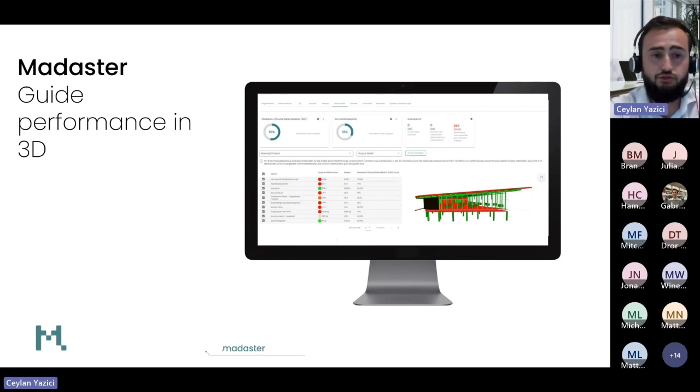We can also report and certify with the material passport. In the Netherlands it's already the case that this results in an extra BREEAM credit, and I can imagine this also exists in other countries. So material passports can be generated in a lot of options — just a simple management summary, but also a more in-depth technical summary if that's needed.

We can also benchmark within the platform, so you can really benchmark within your company. What that does is simply compare building A to building B and says, okay, building A is more circular, but building B has less mass. In that way you can really steer on the KPIs within your company.

So, a couple of use cases. When you get the slides, you can click on them and really see where Madaster is being used and what that does within the companies that are using it.

So it's really great that we are with so many people today, because changing the way we work in order to stimulate the circular economy is something we need to do together. We recognize this, and therefore we at Madaster work with a partner ecosystem. We work with the frontrunners of the circular economy all across Europe, and we are aiming at a worldwide partner network, so we're really happy to help you when we can. So what's next? As we would say, take full material responsibility. I'd like to thank you for your attention.

I'm here, yeah, nice to meet you. Hi, so nice to see you. I'm going to put my camera on briefly, but because of the lighting in this room there's a light ray coming straight through me, so I'm saying hi to everyone, and then I'll switch my camera off. Sweet. And then, so yeah, okay, double check. Perfect, all right, very nice to meet everyone.

Thank you very much for having me today. I'm very excited about talking again to Impulse Partners and your network. My name's Julian, I'm the COO of Ampd Energy, I'm based out of London. So just to give you a little bit of history on the company, we were founded in 2015 in Hong Kong by engineers building lithium-ion battery technology.

We really focused our company more in 2017 when we were approached by a construction company in Hong Kong who said, look, can you do anything about all the diesel generators that we use on our construction sites? Can you replace them with batteries? At that point, our CEO worked together very closely with the construction company, visited a lot of sites, and found out that you could replace diesel generators with lithium-ion batteries. And in the process, not only could it power a lot of the equipment that was on site, it could remove a lot of the problems that diesel generators have, and it could also do that at a cost that was often cheaper than what the diesel generators were.

And so from that point forward, we focused our company on a vision of an emission-free future for construction, reducing emissions in the construction industry. Since then we've scaled across 5 different countries now, and really made a lot of difference in terms of environmental impact. But along the way, we have realized that the technology we've developed is usable across multiple different industries, and so we've recently refocused our vision on what's called Clean Energy Delivered. The idea here is that we are aiming to replace or reduce diesel anywhere a mobile diesel generator is being used, be that in events, in film and TV, in mining, all these areas.

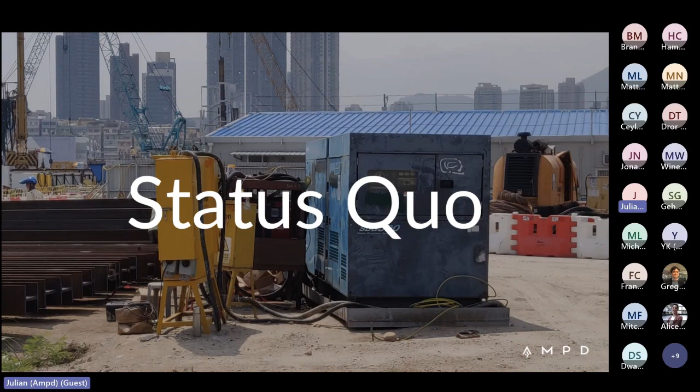So we are focused on basically eliminating or reducing the use of diesel there. But going back to looking at construction too, I can explain a little bit more about how our product works. What we realized when we started looking at these construction sites is either they had no power at all, or they did not have enough power to power all of the equipment on site, which was often thousands of amps. So what the site would do is use diesel generators. If they had a small grid connection, they would use that to power lights or the site office, and then a lot of the larger equipment was powered by diesel generators. But because that equipment wasn't being used all the time, it was actually a very inefficient way of powering it. Diesel generators have a lot of issues, and they're not technology that anyone particularly enjoys using.

They're noisy, both for the workers on site and also the local community, and that noise can actually harm workers' hearing over long periods. They have a lot of downtime due to refueling and maintenance. They break frequently — some of the newer generators in the Euro 5 category actually break fairly frequently, leading to a lot of downtime on site. And you have to bring diesel in and out of the construction site.

Diesel itself is a fire hazard if there's any flame nearby it, and so there's a lot of management that needs to go into that and risk. A lot of the generators out there have no data from them. They're not internet connected. They don't give back information on the operational parameters, on the maintenance or anything like that.

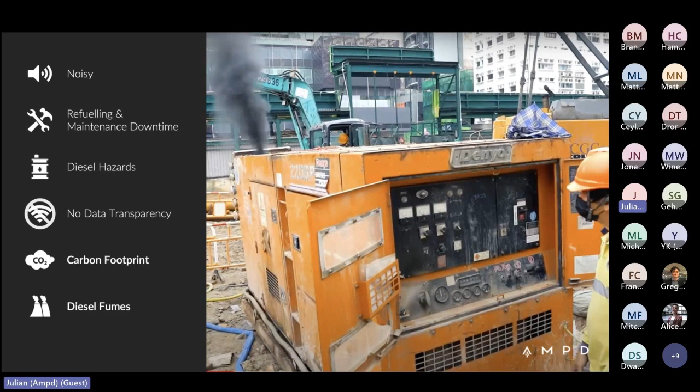But most importantly, they have a very high carbon footprint, much higher than a car. I think it's like 200 times a car, because they're on all the time, all day, every day. And they emit a lot of diesel fumes, which is obviously harmful for both the workers and also the local community around the site. So we worked together with this construction company in Hong Kong to build the Enertainer, energy container, two words combined.

Which is the first cloud-connected energy storage system specifically designed for construction sites. So when I say specifically designed, this includes the mobility of the unit, being able to move around, the safety of the unit, extra safety parameters and systems in place, which were needed in a very mobile and flexible work site. The ability to deploy it very quickly, and to then decommission it very quickly. All the software systems are designed for the construction industry, and so we made it as operationally easy to use as possible, which has been a great success.

So the way it works in reality is that if you look at a lot of the generators deployed in construction, they're often oversized for what they do. The reason for this is that construction equipment, like a crane or a hoist, when it's lifting, needs a very high power just at the point of lift. But most of the time, about 90 to 95% of the time, it doesn't need any energy at all. And so these generators are sized for that peak, and then the rest of the time they just give out a tiny level of power, which is very inefficient.

What you can do with a battery is you can power it on a much smaller connection, fill up the energy within the battery, and the battery handles the peak at the other end. And what this means is you don't have all this idling time from a diesel generator where it's burning fuel and creating emissions and all those kind of things.

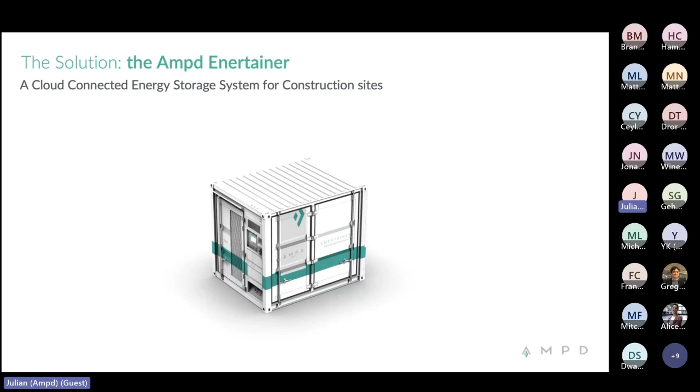Just to give an example, some of the large cranes need about 400 or 500 amps of power at the point that they're lifting. We can power that on a 20 amp or 30 amp feed. So you're reducing your power requirements really, really significantly, which allows you to either use a smaller connection available nearby, or a very small diesel generator running very efficiently, which reduces the diesel usage. And this allows for a very big impact.

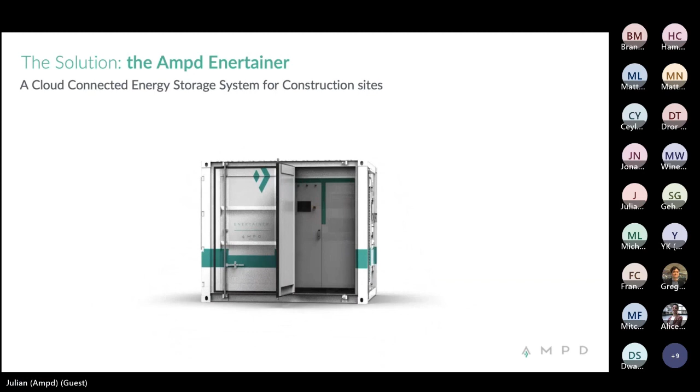So the benefits, as I mentioned, are actually, in the UK, a 90% carbon reduction compared to diesel generators. Completely eliminate the air quality pollutants at site. You eliminate the safety risk associated with diesel spillage and fire. And we're over 30 times quieter than an equivalent diesel generator, which not only is better for the local community and the workers, but also often allows sites to work longer hours than they otherwise would.

We also are cost effective in many cases, in the sense that we're actually cheaper than the generator plus diesel. The battery plus electricity is cheaper than the diesel rental plus the diesel itself. We're connected from the ground up. We're designed to be a connected device, and that allows us to do remote operation and maintenance work, gives a lot of data back to the construction sites, and allows us to access the unit remotely when we need to.

And finally, we're much more reliable than generators. I think generators, we've heard from customers, have about 300 hours per year which is lost due to refueling and servicing. We recommend a biannual visit from a maintenance point of view, but the rest of the time we're very reliable.

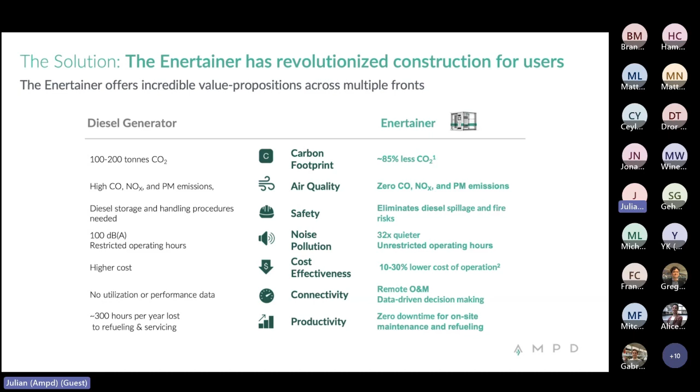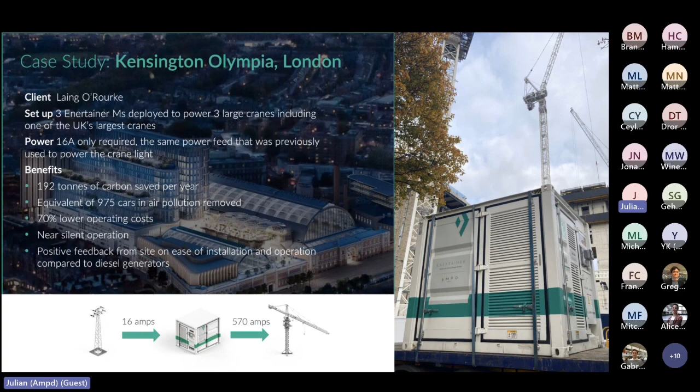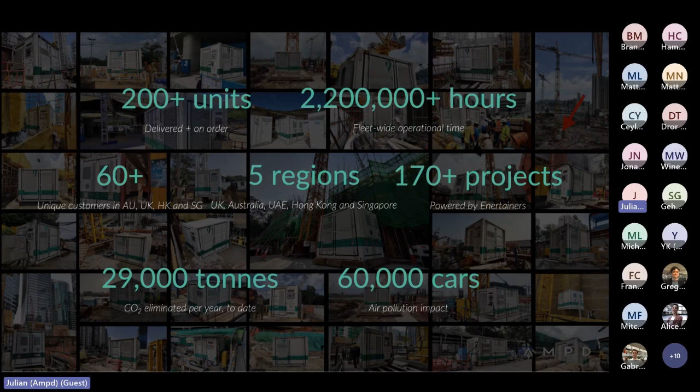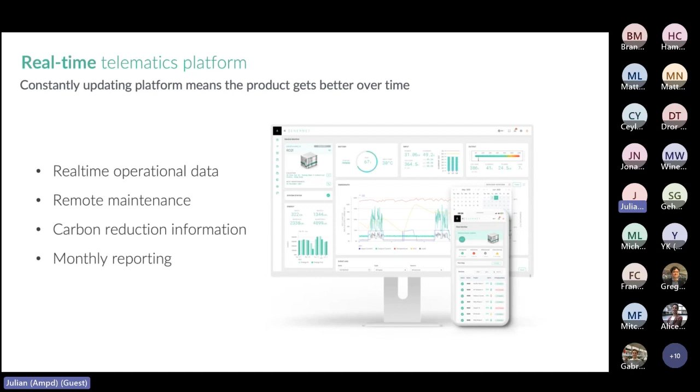This is the platform I was mentioning. One of the great things about our product is it improves over time, because we have a constantly updating software platform. That software platform today offers real-time operational data on what the unit's doing, remote maintenance capabilities that we look at, but also the customer looks at, and can go back historically to see what's happened to the unit. Carbon reduction information, energy usage information, very useful for sustainability teams to see the impact these products are having on their carbon emissions. And monthly reporting, so you get full reports on everything that happened over the last month, with increasing functionalities coming every month.

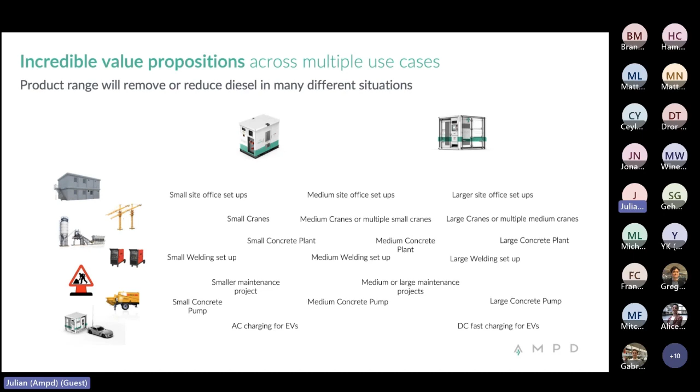To give an example of what that looks like in terms of use cases: the smaller unit might be used in a small site office setup, our larger units in larger site offices, smaller unit for small cranes. Now we're looking at concrete pumps, so we can do everything from small to large concrete pumps, small to large welding sets. The smaller units will be very good for maintenance, so we're looking at railway maintenance, road maintenance, all these kinds of maintenance projects where you need power or energy for a certain amount of time. Concrete pumps, and then electric vehicle charging, particularly on construction sites where you need to deploy it quickly, for AC or DC charging. So we're covering a much wider use case.

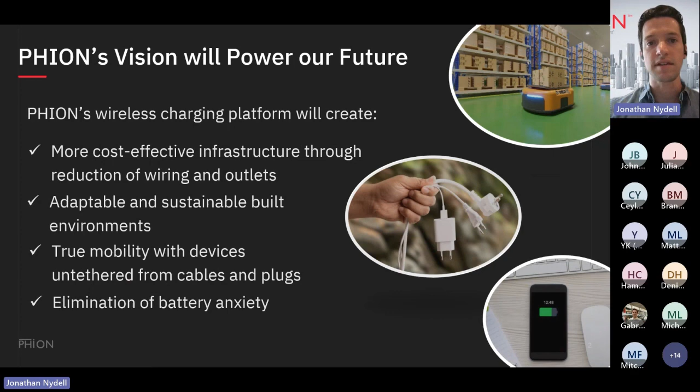Introducing the PHION One solution, the only over-the-air wireless charging platform capable of combining safe and scalable multi-watt power delivery, covering a massive charging volume and defining a new standard for mobility.

The modern job site contains kilometers of electrical cable, hundreds of sockets, electrical installation that requires hundreds of hours of labor. Fixed cabling runs counter to the space flexibility and operational efficiency, both of which are now required in today's built environment. And with the majority of job site workers using electrical devices reliant upon them, charging currently requires a conscious effort during lulls in construction work.

The PHION One platform enables daily efficiency in equipment access and mobility improvements that scale with the size of the project. Through light-based power transfer, the system scales up or down the charging power depending on the device and its requirements. With near hemispherical coverage, omnidirectional charging covers a massive floor space. And finally, the platform includes secure two-way communication between dedicated PHION receiver and transmitter for charging diagnostics, device tracking, job site applications, with access to data that no one else has.

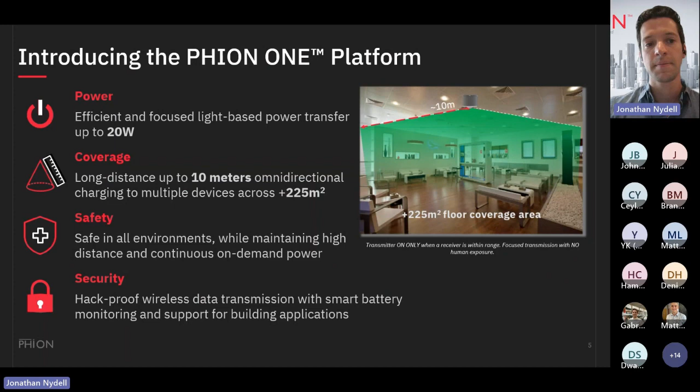The first version we're releasing this year is just the beginning. The platform is evolving, with the next generation delivering 4 times the power to multiple receivers at double the distance without compromising safety or efficiency. What's a lower power system today will scale up to higher power delivery systems following our second generation platform.

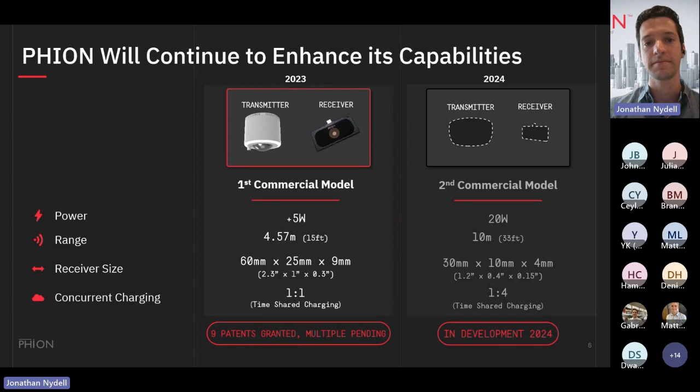PHION's technology delivers more power over distance than any other company in the wireless charging space. What's more is, unlike others, there is zero loss through the air, meaning that the power delivered at 1 meter is equivalent to the power at 10.

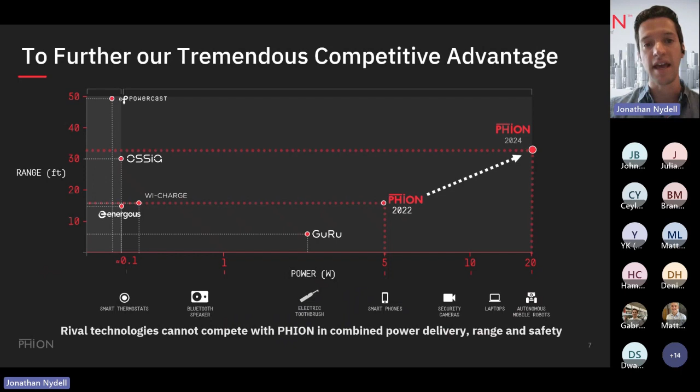The scalability and efficiency of our solution has near limitless applications. No longer are we reliant on small IoT devices for wireless charging, but we can power industrial sensors, personal electronics, robotics, medical devices, construction site equipment. Our platform is a singular solution for the majority of end user devices, simplifying the installation and use of wireless chargers.

One of the challenges that sensor OEMs will face is the trade-off between wireless reporting frequency, how often they transmit the data, and the battery life. The relationship is quite simple: the higher the reporting frequency, the shorter the battery life. On a construction site or industrial environment, near real-time measurement can be critical to safe and efficient operation.

In one of our pilot cases, PHION plans to charge worksite cameras responsible for converting analog measurements into digital data. Crucially, the reporting frequency improves nearly 500x with PHION's wireless charging platform, charging cameras seamlessly and without placement restrictions.

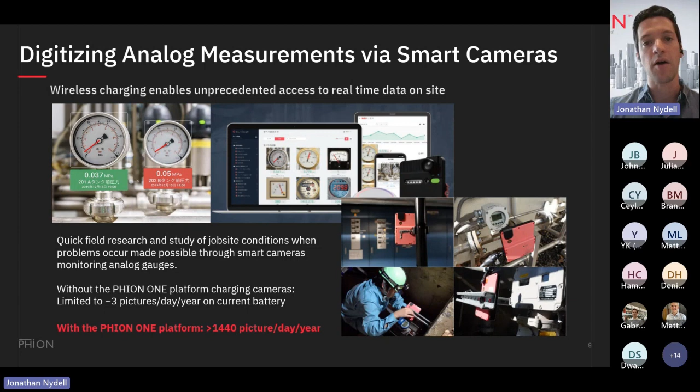Our go-to-market strategy includes two major phases. In phase one, we go direct, integrating transmitters and receivers into GC projects and commercial real estate, establishing the wireless charging enabled infrastructure of the future. In phase two, the integrated infrastructure is our technical and commercial validation to win the OEMs for direct product integration.

This is our end goal: to become part of the product instead of an additional add-on. We see, for example, the iPhone 20 with an integrated PHION receiver and facility lighting of the future with an integrated transmitter, creating a wireless power network behind the hardware.

As an enabling technology, PHION's platform is deeply applicable to a wide range of public and residential infrastructure, similar to the near ubiquitous use of Wi-Fi today. Over 70 billion square feet of existing commercial real estate in the US alone, we're a part of a wave of intelligent infrastructure innovation through services and the integration of IoT devices. Yet, with the proliferation of IoT hardware, it necessitates a sustainable and efficient way to power devices. In short, huge commercial footprint, billions of IoT, and a total addressable market for PHION that's massive.

We're just getting started, and the anticipation is building for PHION's launch across commercial and industrial projects, supported by significant inbound interest. With a small team of 7, we really don't have any dedicated BD folks, and so all of our pilot opportunities have come from outside in.

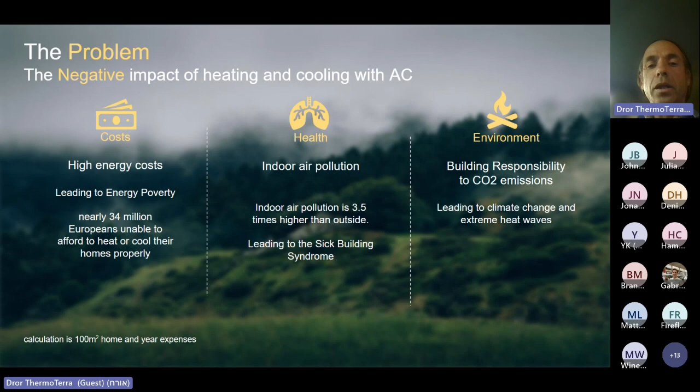For heating, we can save 50 to 80% of the expenses, and for cooling, up to 100%. This reduces dramatically the carbon footprint of buildings.

On the health aspect, our technology is dealing with 5 different aspects of our comfort level, between humidity levels, radiative temperature, air movement, and even fresh air.

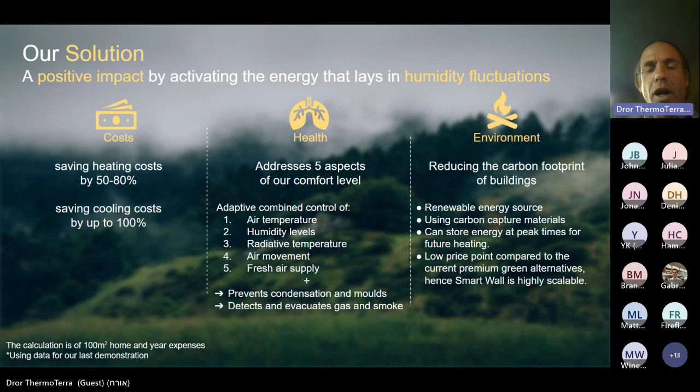So how does it work? We are using the absorption properties of construction material, such as bricks or insulation, and turning those materials into absorption reservoirs.

When we extract water from that reservoir, we get evaporative cooling, and when we absorb it back, we get radiative heating. We are using air paths, such as holes in the bricks or air gaps, to move ambient air in and out from the construction material by using our IoT ventilation units. Then we can control if there will be heating or cooling, or preparing for the next needed cooling, for example.

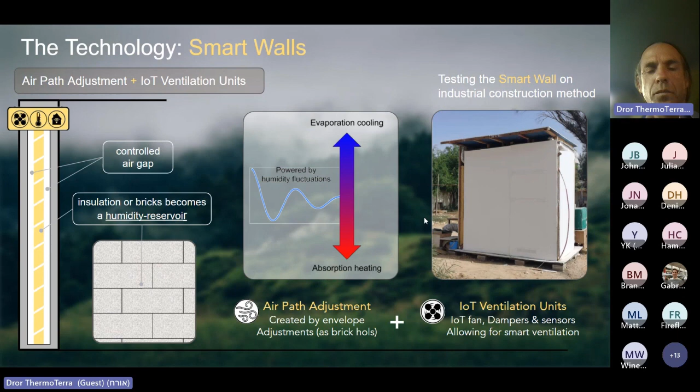On the right, we see a construction that we built in Ben Gurion University, a university located in the Israeli desert, where we compare this construction to a reference construction that the university usually uses. So in the next slide, we are going to see some of the results.

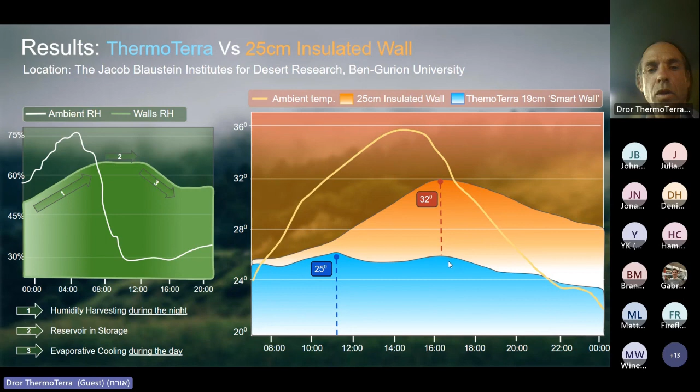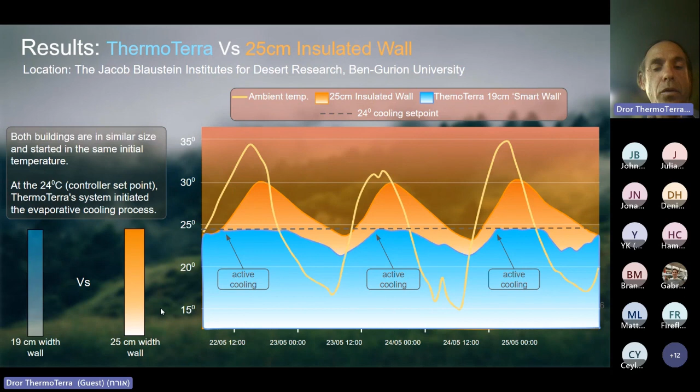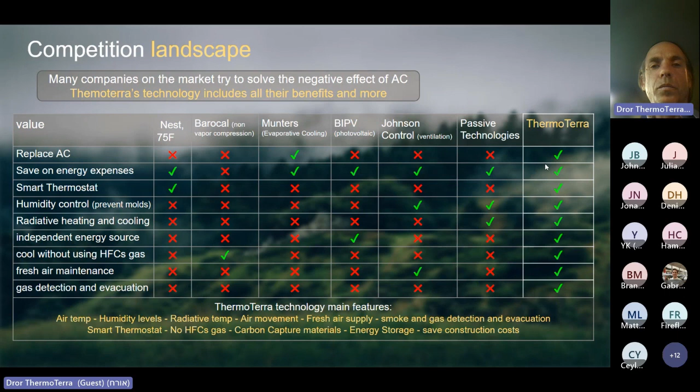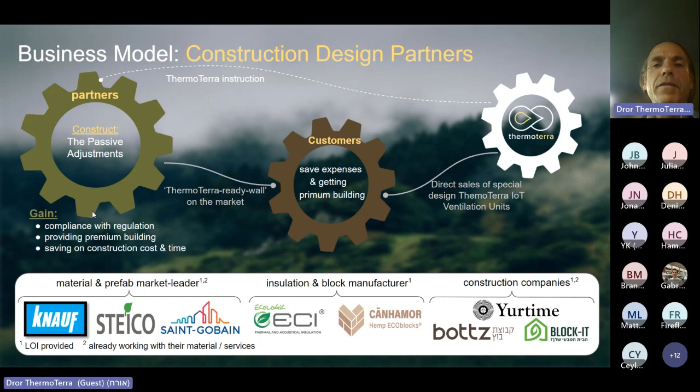Our partners are not only gaining easier compliance with regulation, providing premium building to the customer, but they can also save directly on their expenses. On the following example, we can see that the constructor can gain 10 to 20 euro per meter just by making the wall 20 centimeters instead of 30 centimeters. And the building owner will have his payback time in only 26 months.

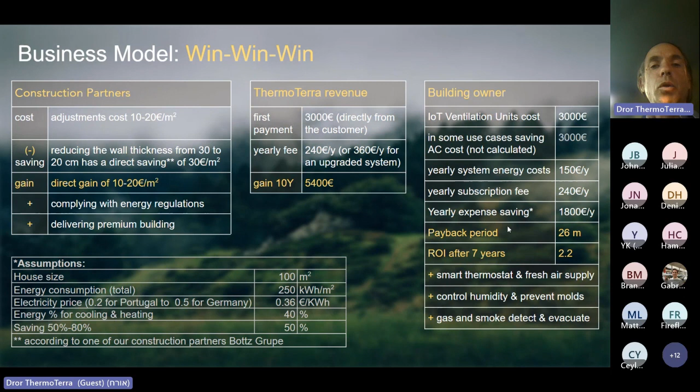We are talking about the green building material market, which is a huge market with more than 700 billion a year. Our first market, our entry market, is the natural fiber insulation market, which is 5 billion. This market is both carbon conscious and health conscious, best fitted for our early adopters.

We already got engaged with a few construction partners and material manufacturer partners, such as Steico, whose material we were using in the previous example that you saw.

Our next market is the building retrofit market. It's a huge renovation wave in Europe and all over the world. Other markets are the building integrated photovoltaic market, where we can give value not only by cooling the envelope, but also by cooling the PV themselves, thereby increasing their electric production. We're intending to work on the double skin facade market and the acoustic tile markets.

We already got our first customer, Eilat municipality. We are now finalizing the last agreements. And we are planning to make our scale up of our entry market in 2026, hoping to get to the break-even point in 2027.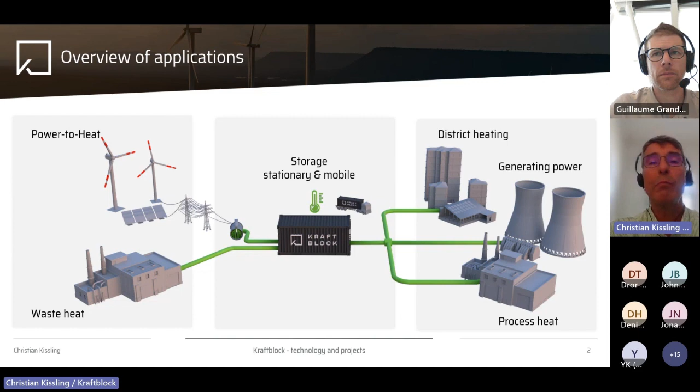So as you can see on that slide, we have a very multifunctional storage system. You see our storage solution in the middle, which either can be charged by waste heat from industrial applications or also can be charged via electricity side in order to tap and store the energy for related downstream application in the district heating, quarter solutions, integration into power business, as well as serving with process heat, either being just hot air, being steam, process steam, or heating up of thermal oil.

A unique selling point of our storage system is that we do have a modular, scalable storage system built out of 20-foot containers. As you can see in the middle of the picture, we can take temperatures from 350 degrees Celsius upwards up to 1,300 degrees. And we can store the energy several hours up to 2 weeks.

The storage material itself is a pellet material, which consists of 85% of recycled material coming from the steel slag or glass slag. We tested it on several cycles, which are equivalent to a lifetime of 40 years, heating it up from ambient temperature up to 1200 degrees without any damages or any impact. And our material has a very high energy density, and we are using a patented system in our storage solution.

So how does the storage cycle work in the storage itself? You see in the middle the storage. When it is charged, hot air is coming from the left to the right hand side. It's going through the packed bed of our pellet material, as I just described it. The hot air is giving the energy to the pellet material and is heating up the pellet material during charging.

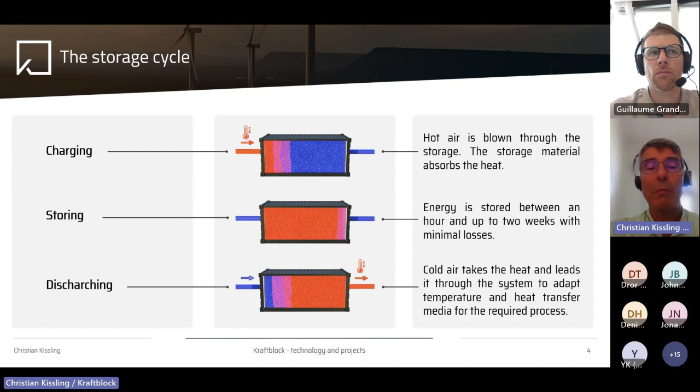During storing, the energy is kept in our storage system for the related required time, which is possible up to 2 weeks. And when we look at the discharge process, again, with cold air, we have a flow of cold air through the heat storage system. That means the heat then is transferred from the storage pellet into the air and serves on the downstream side with the related temperature for the downstream application.

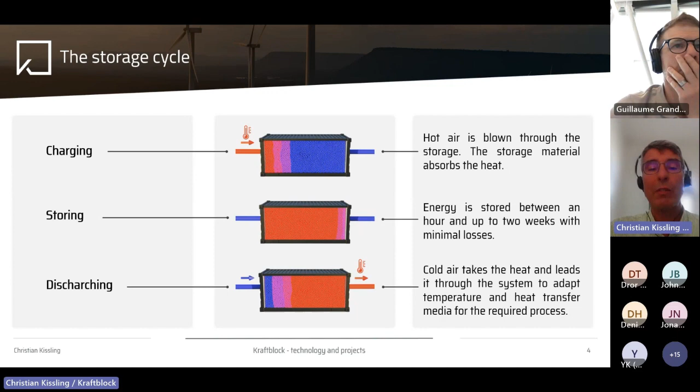So this is just a principle, and with this principle we can work on several applications. First I'm introducing is a net zero heat application. This means we will use renewable power, either wind power or solar power, via a so-called power to heat system in order to heat up our storage. This power to heat system, what you can see here, it is like sometimes you can say it's an industrial hair dryer, but going up to temperatures 800 to 1000 degrees Celsius and available meanwhile in the megawatt scale.

So up to 5 megawatt, we have a project already under execution. That means by this power to heat system, which is an electric air resistance heater, we can make use out of green power, also can benefit from fluctuating power prices, for example, in order to tap energy in our storage system and then give it on a continuous discharge on the downstream application.

So the advantage is that we can buy the power when it is cheap, because renewable power usually is cheap, or when it is running via energy via the stock market. Also, there are periods a day when the power prices are low or even negative. By applying this technology, we are preventing curtailment. It is serving for grid relief, and we can decarbonize industrial processes up to 1000 degrees, and by this replace fossil fuels. And it is more or less applicable in all industries which are requiring process heat.

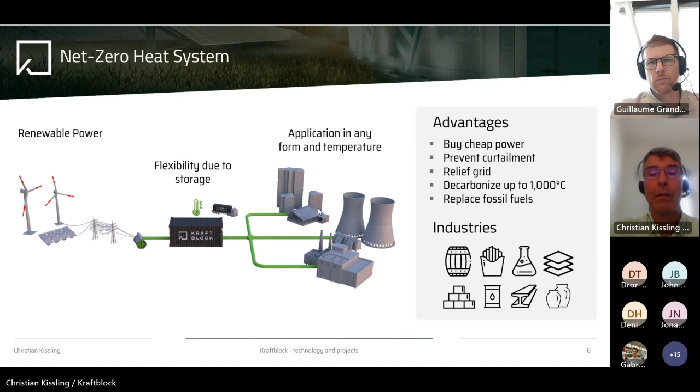A major project we have is with PepsiCo. In this project, it is dealing with Lay's potato chips. So the idea is to skip a 22 megawatt gas boiler, which is required to heat up thermal oil. The thermal oil is heating up frying oil in order to produce the potato chips. And the idea is to skip the gas consumption and do it via this electricity.

So the idea is to make use out of the low electricity prices. And in this project, we are realizing the largest high temperature heat storage project which is under realization up to now, which consists of in total 5 units with a gross capacity of about 150 megawatt hour gross capacity.

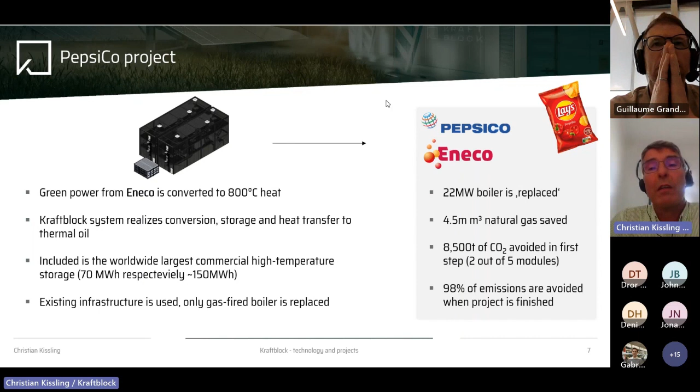And 2 of those 5 units we are delivering by end of this year to the project in Netherlands. And when at the end of the day, all 5 modules will be installed, 98% of the emissions will be avoided, and the client is in the position to buy green-made, fossil-free made potato chips. So this is a very interesting project to tap green energy on low-cost price in order to produce a green product at the end of the day.

The other way is waste heat recycling. In this case, we are feeding our storage with waste heat, either from the glass or steel industry, where we have a very high temperature level. We have to see if we have to clean the flue gases or if we can take it directly.

By this, we are reducing the need of primary energy because the waste heat can be used for another process. We are avoiding emissions. It's also cost saving, and it's a very good idea for industries where they want to get rid of their high temperature flue gas energy without just leaving it to the atmosphere, but make use of it in another application.

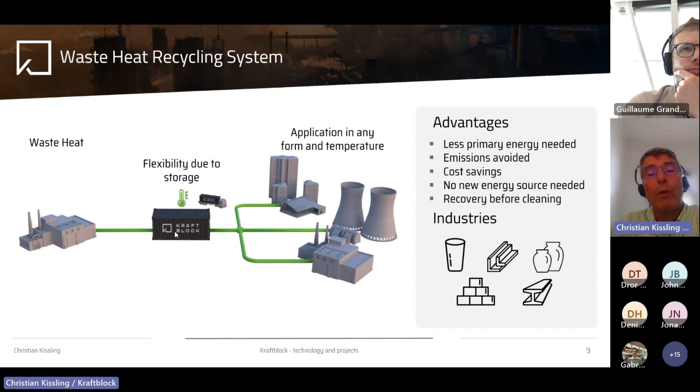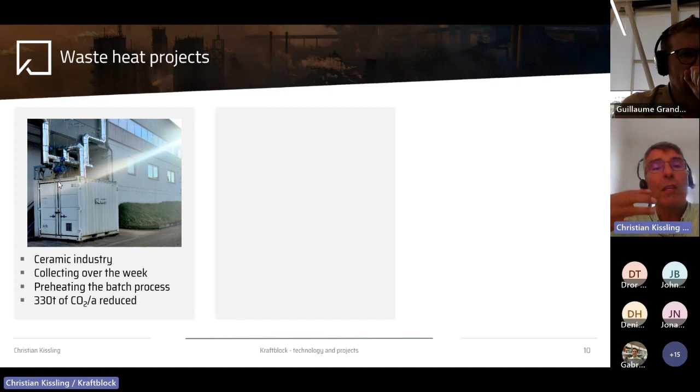Also, one application could be a mobile one, to bring the heat from A to B. The projects we have here in waste heat, our first reference project, built in 2019, is in the ceramic industry. It's a ceramic grinding wheel production where from the oven we take the waste heat of a batch process, put it into our storage.

Another project is within the steel industry with Tata Steel in India, where we take the waste heat from the sinter plant cooling in order to heat up process water. This is also under realization with local partners in India at the moment.

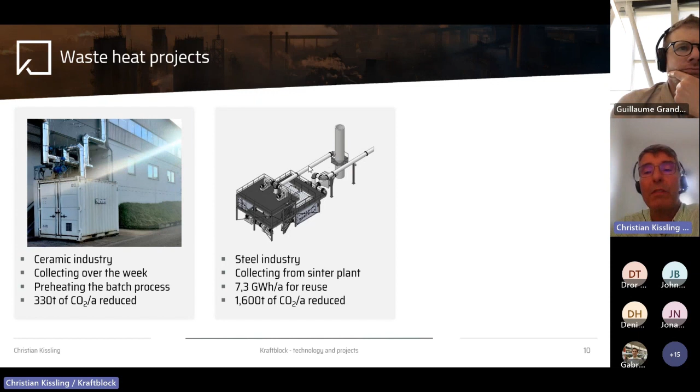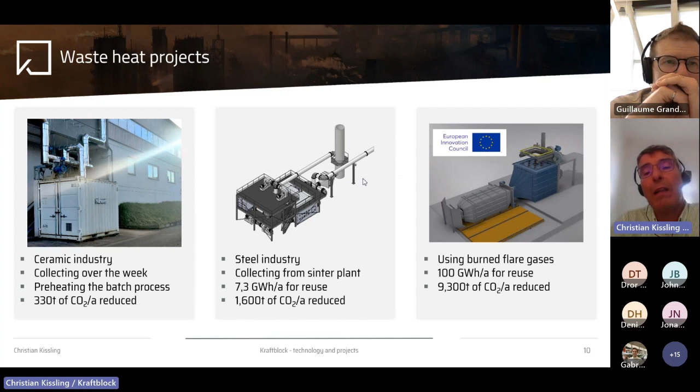The last one is a project from the European Innovation Council, which supported us, where we are using the cleaned converter gas from the steel industry. We take this cleaned converter gas, put it in an adiabatic combustion chamber, combust it at 1200 degrees and bring it into a container, which can also be a mobile one, and bring it from A to B to make use of this heat at another location.

This is the mobile heat I just talked about. This is a new business model, meaning we are decoupling not only time-wise, but also location-wise. In one container, depending on the circumstances, we can store up to 4 megawatt hours. Within a truck on the street, we have a weight limitation to consider, but you could also scale it up with a fleet of trucks or with a train.

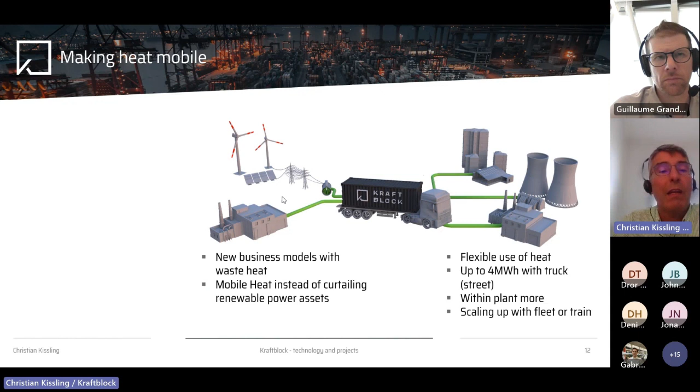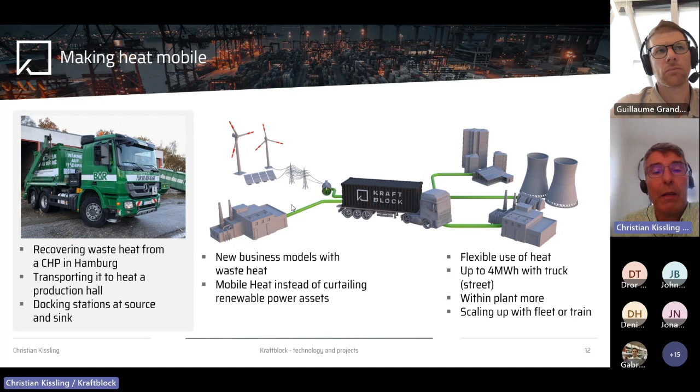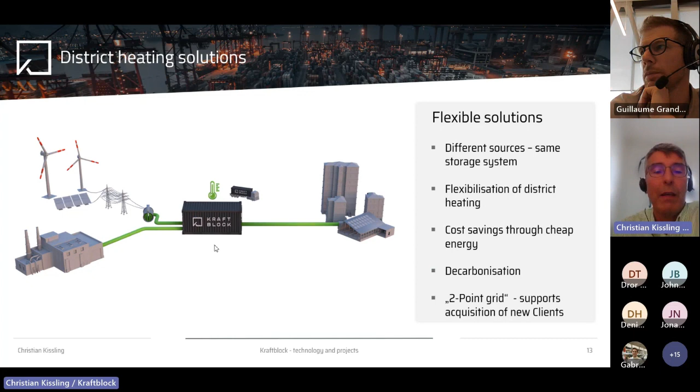Yeah, that's it from my side. If you have any questions, please feel free to ask me.